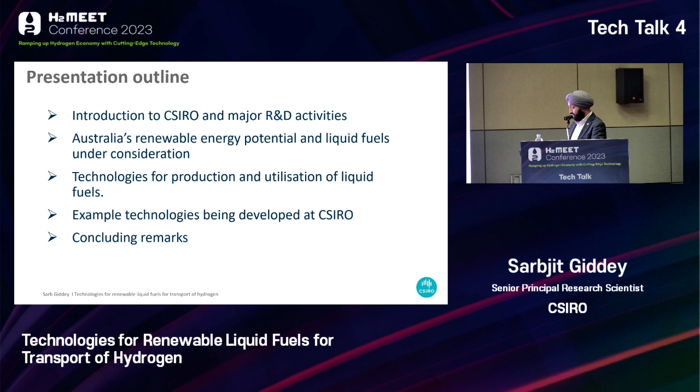CSIRO is Australia's major government funded research and development organization. We have about 5,000 staff and about $1.2 billion budget. About half of the funds come from the government, and the rest of the funds for the R&D work comes from working with industry and through our intellectual property, through licensing our technologies.

Just a bit on CSIRO's, some of the inventions I have just listed here. As everybody knows about Wi-Fi that you use every day for your laptops and mobile phones, it's CSIRO's own invention. Also the plastic banknotes, that's also CSIRO's invention, and some of the others. Just to mention ultra battery, that was also an invention of CSIRO, which is a hybrid technology of lead acid and ultracapacitor.

This is just showing the complete suite of hydrogen related technologies, starting from hydrogen production by biomass or by electrolyzers integrated with renewable energy sources, up to the end utilization of that hydrogen in the industrial sector or for automotive applications. So CSIRO is working and developing various technologies in this suite of technology shown here.

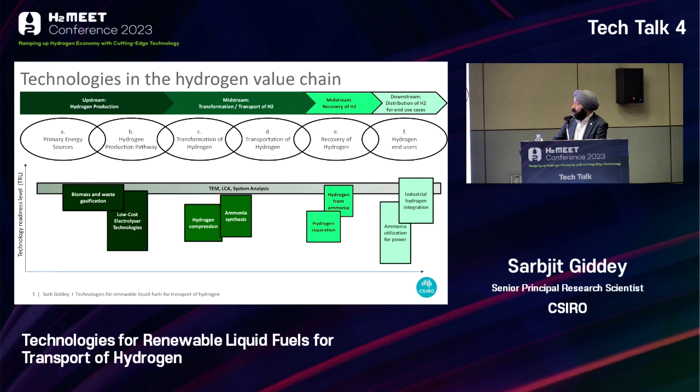On the group's activities, within CSIRO Energy Business Unit we have about 350 staff, and the Energy Business Unit is further divided into 3 programs, one of which is Energy Technologies. Within Energy Technologies we have 3 groups, one of which is thermal electrochemical technologies, and in that group most of the work is related to hydrogen.

and renewable fuels. Another group is working on solar related technologies like solar PV and solar thermal, and the third group is working on sustainable carbon technologies, mainly looking at CO2 capture and CO2 utilization.

Within the thermal electrochemical technologies group, we are basically focusing on 4 areas. The first one is on the production and utilization of renewable fuels, such as hydrogen and ammonia, developing technologies which are more efficient, more scalable, and can also be deployed at distributed scale. Some of the technologies we are looking at are fuel cells, electrolyzers, hydrogen storage, and also hydrogen and ammonia utilization in solid oxide fuel cells or in PEM fuel cells.

The next area we look at is circular economy aspects of these technologies. As you know, these technologies use quite expensive material which can be very scarce, for example using noble metal materials like palladium, platinum, iridium. We are developing technologies for how these devices can be recycled, in terms of extending their lifetime, but also looking at how we can take out the materials and use them again to build those devices.

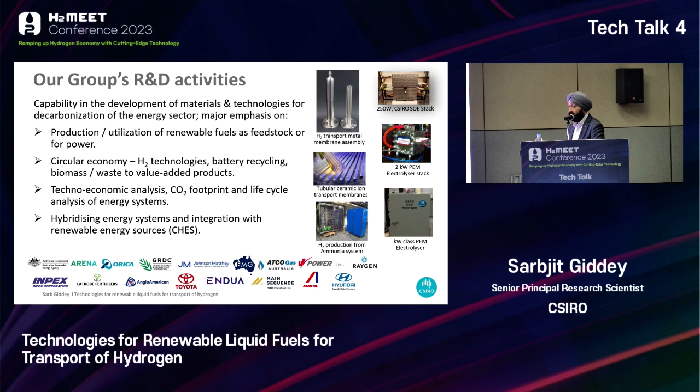Our labs are situated in Victoria, in Melbourne, in Newcastle in New South Wales, and in Brisbane. That's where most of the work on hydrogen and ammonia-related technologies is carried out.

This is just to show Australia's renewable energy potential. As everybody knows, Australia has vast resources of renewable sources, whether it's solar PV, wind, geothermal, or tidal power. If we look at Australia's current electricity installed capacity, it's around 65 gigawatts, and if we compare that with the global installed capacity, it's only around 8,000 gigawatts. Australia has a renewable energy potential of more than 25,000 gigawatts. So you can see how much capacity Australia has to turn those renewables into some usable form, for example liquid fuels, which can be transported over long distances to places where the renewable energy source is not available.

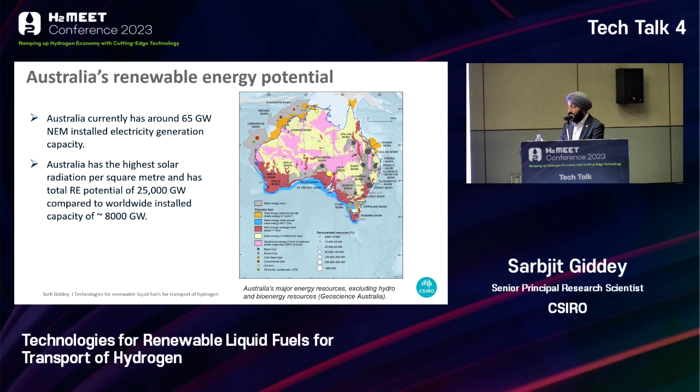This is another map showing Australia's renewable hydrogen mapping scenario. As you can see, the dark green patches in the inland places are where both solar and wind are available. That means you can get very, very high capacity factors, more than 70%. And where one of these resources is not available, there's hydroelectric power available. So we can put these together to achieve very, very high capacity factors, and then use that electricity to produce hydrogen.

As you know, the cost of hydrogen is dependent upon three major factors: the electrolyzer cost itself, the electricity cost, and also the capacity factor, how long you can run your electrolyzer during the day. These are the three factors which really determine the cost of hydrogen. So Australia is in a very good place to use electrolyzers and renewables to produce hydrogen, and turn that into liquid fuels.

On the right hand side, that's the pie chart which basically shows the kilometer square of land area of the top fifth of the prospectivity ratings. As you can see, there's a lot of land available where the renewables are available to a very, very high capacity.

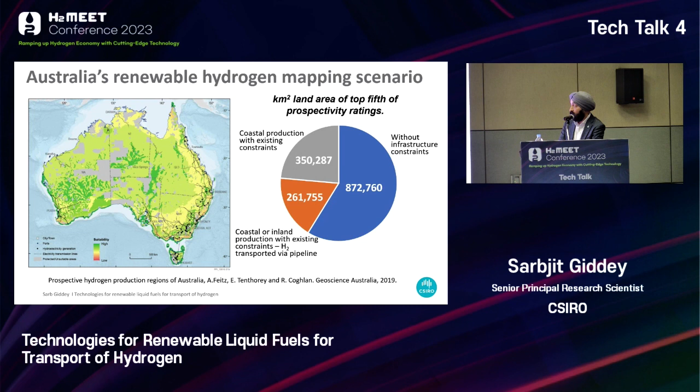The fuels under consideration are three types of liquid fuels: one is liquefied hydrogen, the second is ammonia, and the third is methylcyclohexane. All of these have their own advantages and disadvantages. Liquefied hydrogen requires energy input of almost one-third of the energy content of hydrogen, but it's a pretty good fuel - it's pure hydrogen available on-site that you can immediately use. But on the other hand, there's no infrastructure yet to transport liquefied hydrogen from one place to the other, and there are also some boil-off losses. These are the things we have to consider when considering liquefied hydrogen as a transportable fuel.

The second one is ammonia. As you know, it has the highest hydrogen content, and there's already infrastructure to transport ammonia from one place to the other - all the regulations are in place. But ammonia still requires energy to produce it and also to crack it. Not only that, once you crack it, you have to purify that hydrogen so that no ammonia is left, to use it for fuel cell applications, whether residential or automotive.

The third one is methylcyclohexane. That's basically used as a way of carrying hydrogen from one place to the other. You have to hydrogenate toluene to convert it into methylcyclohexane, and then again convert methylcyclohexane back into toluene. Both processes require higher temperatures, higher pressures, and some purification will be required when you dehydrogenate methylcyclohexane into hydrogen. Another disadvantage is that once methylcyclohexane is transported and you strip the hydrogen out, you have to send that toluene back in the ship. So that's going to cost.

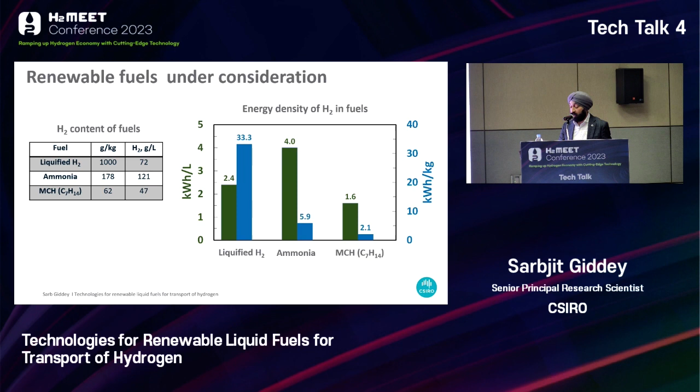Apart from liquefied hydrogen, ammonia, and methyl cyclohexane, there are other fuels also being considered, like methanol, dimethyl ether, even methane as well. If CO2 can be captured from some sources, from industrial processes, we can convert that CO2 and hydrogen produced by electrolyzer into these liquid fuels.

So I'm just going to cover some of the technologies being developed. There are conventional technologies, and then there are new technologies being developed to make ammonia production and methyl cyclohexane production more at a distributed scale, make it more efficient, and also generate some processes which can be integrated easily to the renewable energy sources.

So this slide basically shows how ammonia synthesis technologies are being developed. As you know, currently ammonia is produced by the Haber-Bosch process. Natural gas is the feedstock used there, and it requires very high temperatures and pressures, so we are looking at more than 200 bar pressure.

So here are some of the alternatives people are looking at. One is just improving the Haber-Bosch process itself, developing new catalysts, improving the catalysts and absorbents which can absorb ammonia, and basically shift the equilibrium so you can produce more ammonia, more conversion of nitrogen and hydrogen to ammonia. The second one is looking at just producing hydrogen from an electrolyzer, then compressing that hydrogen to higher pressure, and also producing nitrogen from an air separation unit, and then you can still use the Haber-Bosch process and produce ammonia.

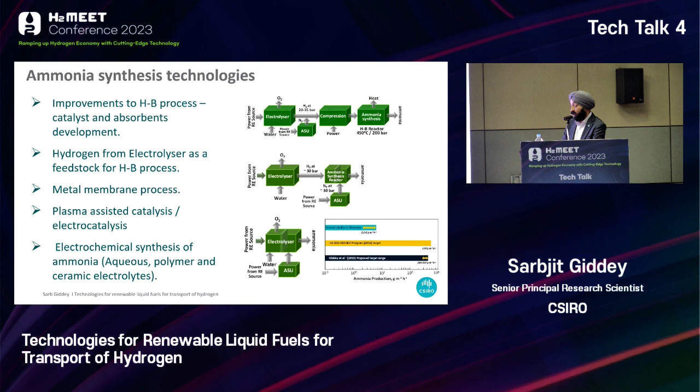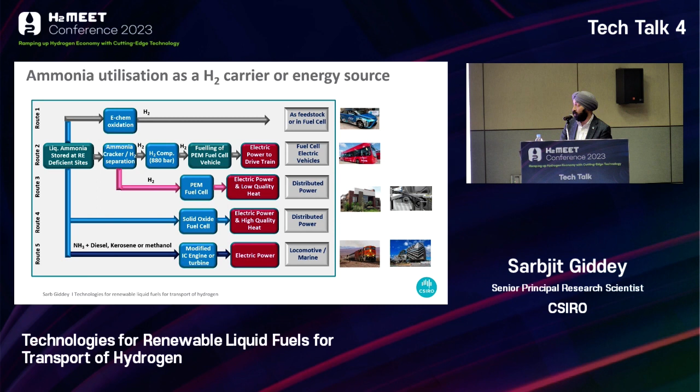So now we are looking at, can we look at some electrochemical technology? Why we want to look at electrochemical technology is because they can allow us to be easily integrated with renewable energy sources, and they can be at a distributed scale. Also, if we are using a membrane in there, ceramic or polymer membrane, that will allow us to produce pure hydrogen. It may not need any hydrogen purification.

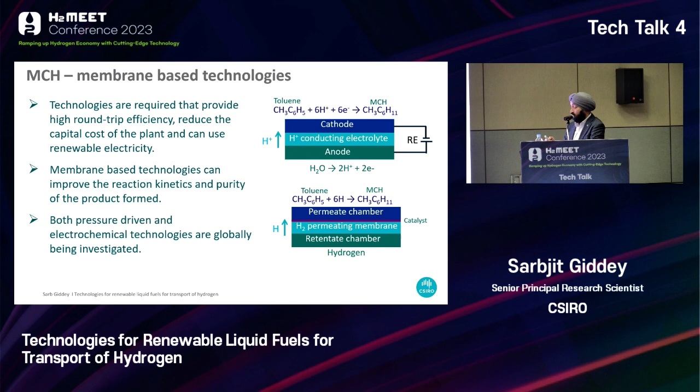So that's the processes. These electrochemical - one at the top is an electrochemical process, but then at the bottom is a metal membrane based process. So either it can be voltage driven, and the bottom one based on metal membranes can be just a pressure driven process. But again, this technology is at a very early stage - there's a lot of work being done in this area.

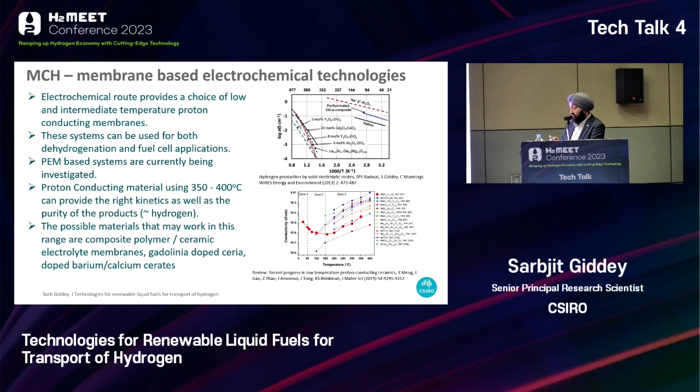But this can be the next thing which probably can make our dehydrogenation processes quite efficient if we can develop those materials, and it can be deployed not only for methylcyclohexane or toluene, but also for ammonia cracking or ammonia production, because you can have steam on one side, produce your protons which go through to the other side, and you can have hydrogen on the other side. Currently there are no materials available which give sufficient proton conductivity but are also robust, so that's a quite good area to look at.

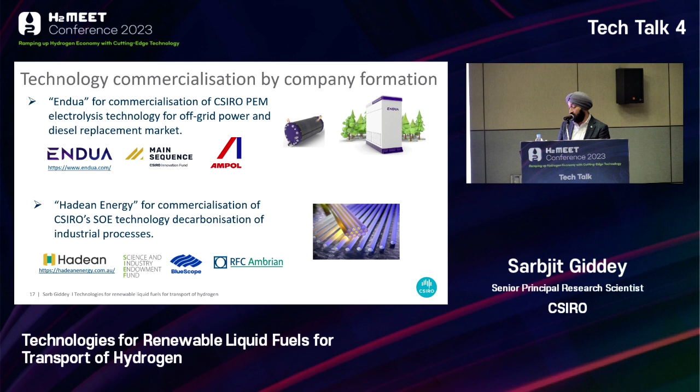Just touching on ammonia synthesis, this is another technology we have been developing. As I mentioned, it's a membrane-based technology, and it allows you to use hydrogen directly from the electrolyzer fed to our reactor. It's a hybrid concept, membrane-based reactor, and you can produce ammonia. We've been able to produce ammonia at 450 degrees centigrade and around 30 bar pressure. The hydrogen, available directly from the electrolyzer, fed directly to the reactor, allows us to achieve between 10 to 15% hydrogen-to-ammonia conversion rates. That's another technology, based on our metal membrane.

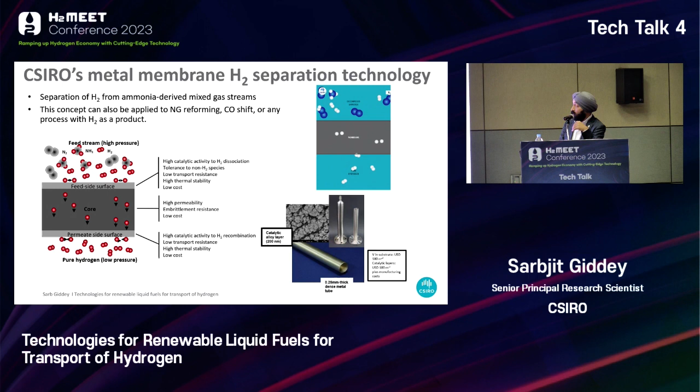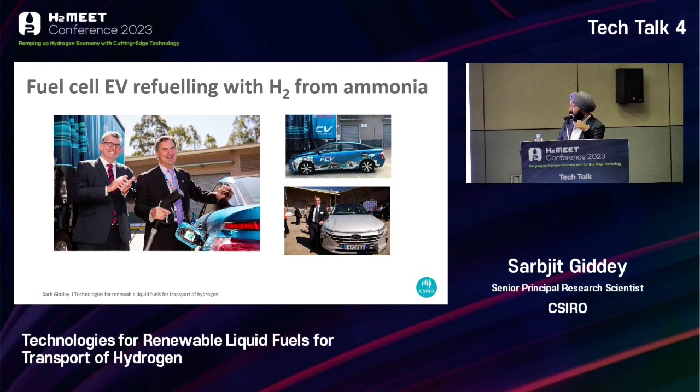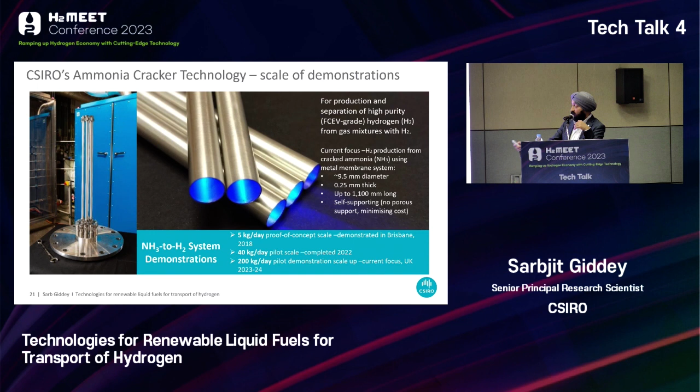This is ammonia cracking technology, and it allows you to produce 100% pure hydrogen. We demonstrated this technology in 2018 by refueling Hyundai and Toyota fuel cell cars. We have been working with Hyundai to develop this technology to the next stage. Currently we are at 40 kilograms hydrogen production per day. Thank you.

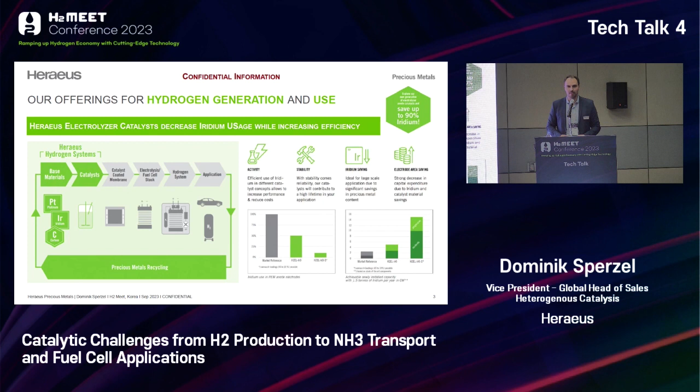Once the hydrogen has been produced through PEM or any other technology, very likely there is a requirement of purification post-electrolysis. Here a deoxygenation reaction can take place when you want to purify the hydrogen from traces of oxygen that might be left within the stream.

Different technologies can be applied, both platinum-based and also palladium-based technology, depending a little bit on cost. Historically everyone used palladium because it was super cheap, but then through usage in gasoline engines the price of palladium surged quite a lot. So platinum became a little cheaper, and you can easily substitute both metals and exchange them. The cheaper option in the market today is platinum-based versus palladium-based.

These catalysts come in all different shapes and sizes—pellet types, sphere types, star type, whatever you guys prefer, that's all available.

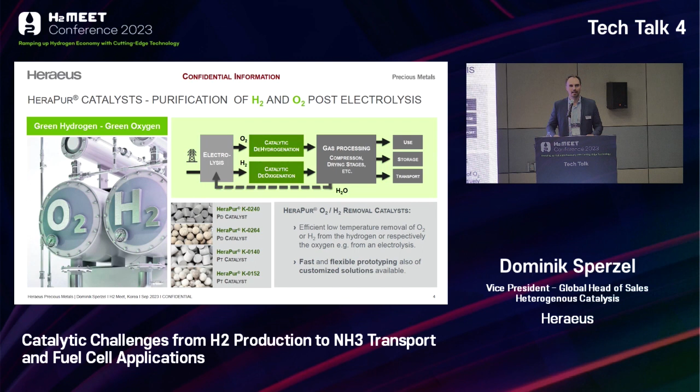Also, one very interesting move that many of the large EPCs are currently making, companies like Linde or Air Liquide for example, is that they also look at oxygen as a value stream. And here in the oxygen there might be trace amounts of hydrogen, so through a catalytic dehydrogenation you can also get rid of the hydrogen and build use cases for the oxygen as well.

Once hydrogen has been produced and purified, I also wanted to connect to the former speaker—it needs to be transported. Because I come from Germany, and in Germany we have big problems with high energy prices and high energy imports, because we cannot produce a lot of energy by ourselves. So we're really dependent on energy exporting countries, like maybe Australia in the future.

Different types of carriers have obviously been discussed in academia for many years, but also within the industry. In Germany, I can tell you we are very much hyped by ammonia. Why? The infrastructure already exists and it just needs to be scaled. We believe this is the main advantage for ammonia at the current place.

Also, when we look at the catalyst space, for example, our company has been involved within the ammonia value chain for many years already. The main application for us is so-called ammonia oxidation, the Ostwald process, mainly for the fertilizer industry, or Australia. There's also big markets with companies like Orica that produce explosives, for example. So we know a lot about this industry, a lot about problems with ammonia, and a lot about how to make best use of it.

So our company has also decided to move a little bit forward in the value chain. We have, in partnership with companies, developed technology for ammonia synthesis. And also what we're going to show today, we have developed our own proprietary technology that we supply to different players within the market for cracking.

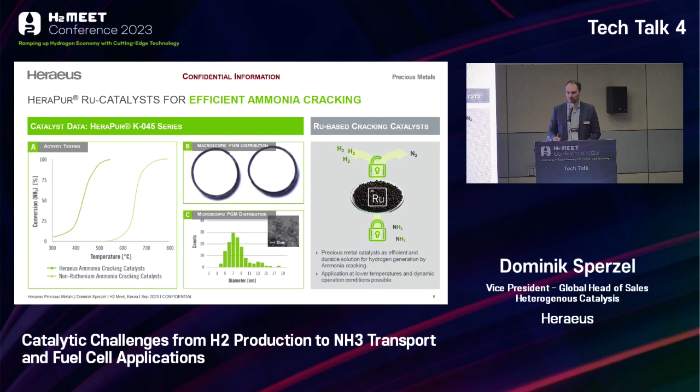When we look at ammonia cracking, we basically see different use cases, and different catalyst technology will be applied for these. We see 3 in particular. Number 1, large industrial processes. One could think about, for example, a large harbor where you have ammonia tanks and ammonia tankers providing ammonia into large storage facilities, then a large scale cracker, and the hydrogen ultimately is directly fed into the existing natural gas grid.

So there are many case studies currently within Europe, for example in the Netherlands, in Belgium, and also in Germany, where big EPCs have already built their pilot plants. We also know that, for example, in the Korean market, there are many pilots planned through smart energy institutes and large companies. So this is for sure something which will find a way in the future.

What we realize is that many of these companies simply try to retrofit the existing SMR technology, and I think it's quite a smart move because SMR is quite well studied. The reactor technology is very well known, the equipment is very well known, so it's just a different feed that you feed to the reactor, and here catalysts are also very well studied. I provided a few examples, for example this ring-based catalyst, which might have some pressure drop optimized behavior ultimately.

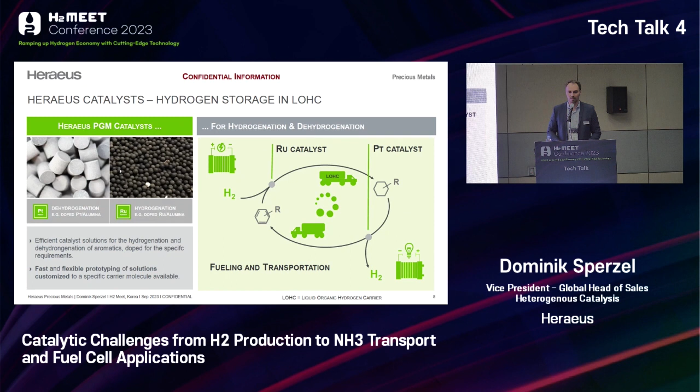And then lastly, I wanted to mention it because when I looked at the exhibitors here in Korea, I saw a lot of activity also in decentralized reforming applications for decentralized heat and power, for example, and a lot of different units. For this type of application, it can be an SOFC that they are utilizing, it can be something different. Also in the balance of plant, different catalytic components are being applied. We can work a little bit on the saturation of the hydrocarbons being used, because for sure it will not be direct hydrogen that will be injected at the very beginning. For example, in Germany there are discussions to at least feed a little bit of hydrogen into the existing methane that we already have available in the grid as of today, and so gradually there will be a shift.

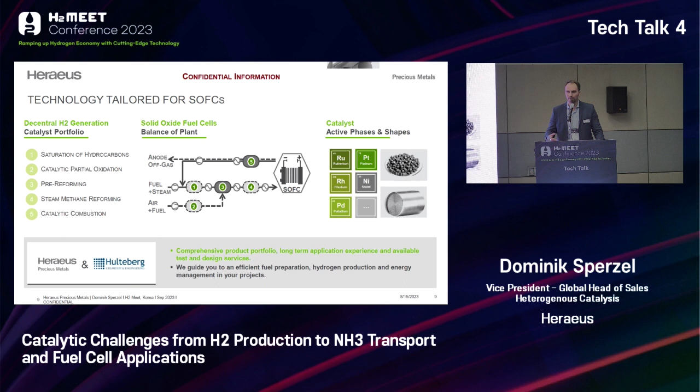But in order to make use of the methane that we have as of today, reforming, for example, is required. So we have developed nice pre-reforming and also main reforming technology, which can be integrated directly into the stack through the formulations that have been developed. And then, in many applications, a catalytic afterburner for any potential hydrogen that might be released into the atmosphere might also be required in this system. So I recommend, because I saw 6-7 exhibitors here, very smart concepts, some in the prototyping phase, some already selling, and I believe it's quite interesting. And again here, different metals can be applied in different shapes and forms, depending on the overall engineering setup.

Yeah, and also as said, many companies like our company, I think we have smart solutions for the catalyst, and also from the commercial standpoint. For example, we have trading offices around the globe which help purchasing people buy precious metal at the right time, to make it available at the right time, in the right quality, at the right place.

But what's super crucial, no technology in the new world will survive without any recyclability. And in my point of view, that's one of the beauties of our products, because they are 100% recyclable. So if you think about iridium in a PEM stack, if you think about platinum in a fuel cell, if you think about ruthenium in cracking, these metals will not disappear. And already as of today, there are very smart collection systems out there, and companies like ours, or for example in China, we have a large joint venture with BASF on the recycling.

These metals can be reused infinitely. So you might have a high initial investment, but then you already use the metal again for new catalyst campaigns, and it brings down capex and opex quite dramatically.

And the recycling rates nowadays, because so many materials are very well studied, are super high, in the very high 90% range, depending on the matrix obviously. But recyclability is one of the big pluses of precious metal related technologies.

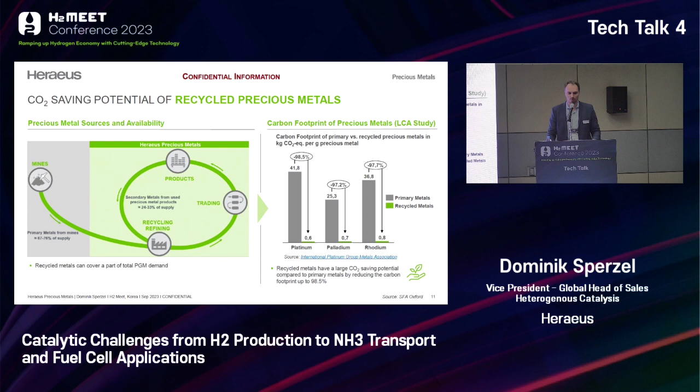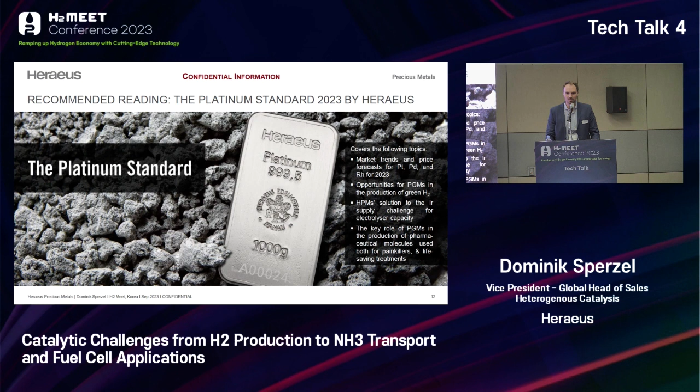With that, we also do a lot of research on the metals. So if you want to go on our website, we have just recently published the platinum standard and also the palladium standard, where it's free for download. We do it together with an agency in the UK which is specialized on this research, where you can read up a little bit about the trends.

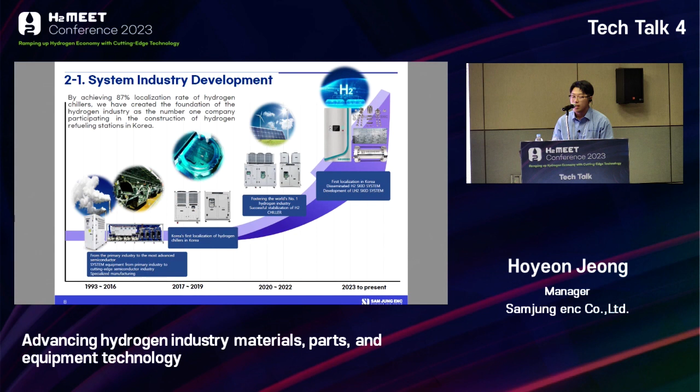수소 냉각기 부분입니다. 우리 삼정 ENC는 1993년에 창업을 해서 산업용 냉각기로 시작을 했습니다. 1차 산업부터 최첨단 반도체 산업까지 36,000건의 냉각기 실적을 보유하고 있는데, 2017년부터 수소 충전소용 냉각기를 납품하고 H2 칠러 안정화에 성공하면서 현재 대한민국에서 수소 스키드 시스템 보급, 그리고 액화 수소 스키드 시스템까지 개발하고 있는 실정입니다.

수소 냉각기의 기술 발전입니다. 맨 처음 수소 충전소가 구축이 될 때는 해외 제품을 모방하거나 해외 냉각기를 수입해서 의존하던 실정이었는데, 거기서 우리 삼정 ENC는 독자 개발, 국산화에 성공하여서 국산화율 87% 이상, 또 수소 전문 기업 선정 등으로 현재 독보적인 1위를 달리고 있습니다.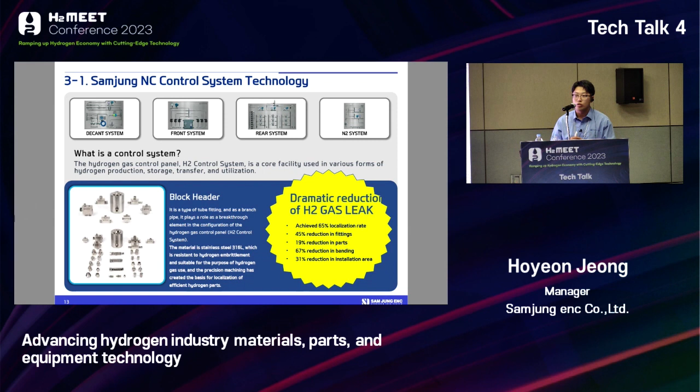우리 삼정 ENC의 제어 시스템 부분입니다. 제어 시스템과 수소 H2 컨트롤 판넬에 있어서 다양한 형태로 수소 생산, 저장, 이송, 그리고 활용까지 전반적인 수소 제어를 할 수 있는 판넬이라고 보시면 되겠고요. 최근 우리 삼정 ENC에서 블럭 헤더라는 것을 개발하여서 유니온 연결 부위들을 블럭 헤더를 적용함으로써 수소 리크 포인트를 줄인다든지 운용 비용 절감 등의 효과를 누리고 있습니다.

수소 부품 국산화 신기술인데요. 이런 수소 제어 판넬에서 사용되는 부품들, 수소 판넬에 들어가는 부품, 이런 부분에서 우리 삼정 ENC에서 직접 개발하고 생산하고 있습니다.

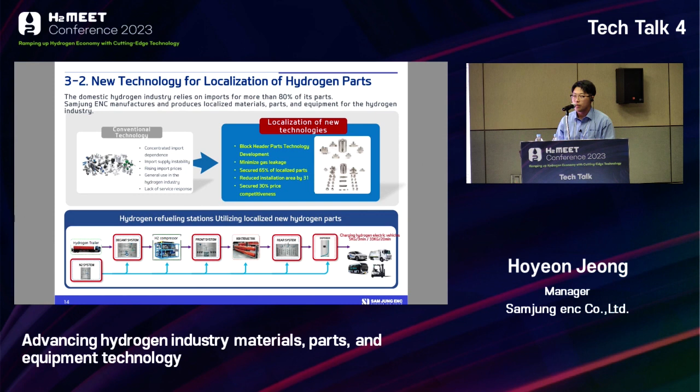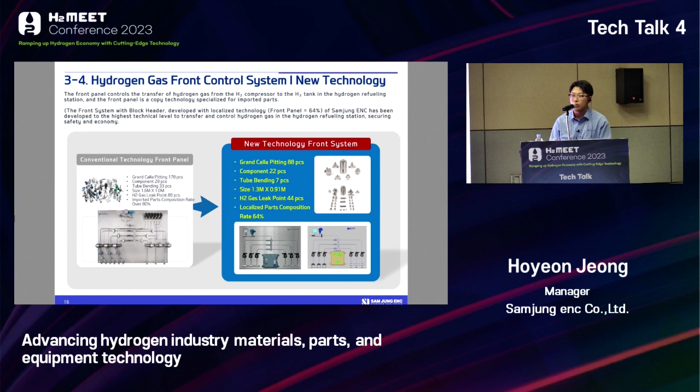프론트 컨트롤 시스템입니다. 아까 데칸트 판넬 같은 경우에는 튜브 트레일러에서 수소 압축기로 갔다면, 압축을 한 수소를 이제 저장용 탱크로 이동할 때 사용하는 판넬이라고 보시면 되겠고요.

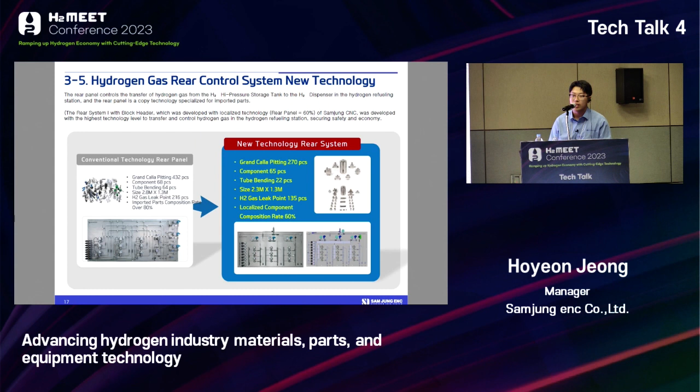리어 컨트롤 시스템입니다. 아까 압축기에서 압축을 해서 저장용 탱크에 저장을 했으면, 이제 실제로 차량에 충전을 하기 위해서 저장용 탱크에서 수소 충전기로 이동할 수 있도록 제어를 할 수 있는 리어 판넬이라고 보시면 됩니다.

N2 컨트롤 시스템입니다. 이러한 부분은 질소 컨트롤이 필요한데요. 수소 충전소에서 질소를 제어할 수 있도록 만들어진 판넬이고, 여기에도 모두 블록 헤더가 적용되어서 특허 기술을 적용하였습니다.

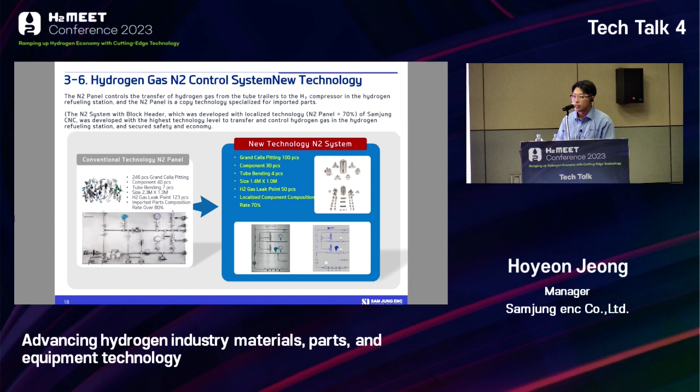우리 삼정 ENC에서 수소 경제 네트워크를 이루고 있는데요. 최근 한국가스기술공사라든지 수소융합 얼라이언스 쪽에서 저희에게 수소 전문 기업을 지정을 해주었고, 또 대기업이라든지 여러 중소기업 등 수소 경제 네트워크를 활성화하는 데 주력하고 있습니다.

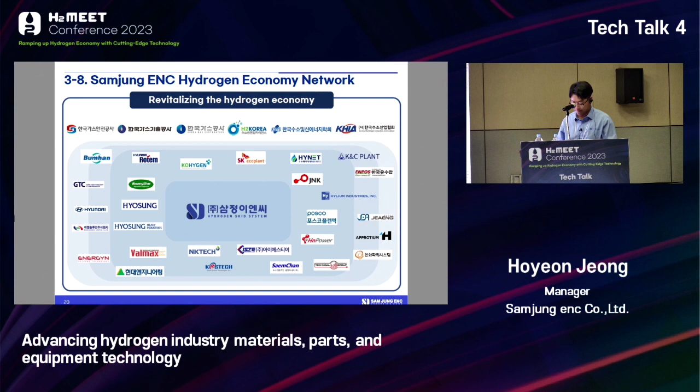우리 삼정 ENC는 기술 혁신과 사회적 책임을 다하는 수소 전문 기업으로 성장할 것을 약속드립니다. 감사합니다.

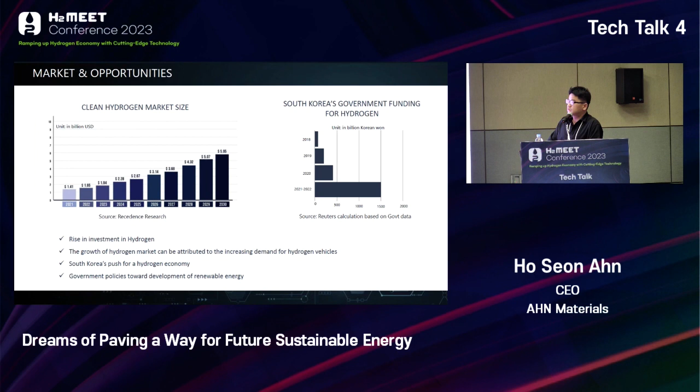Here is the market and opportunities. As time goes, the clean hydrogen market size is growing like this, and South Korea's government funding is also increasing dramatically. Government policies for the development of renewable energy are very fresh and promising to us. And here is the current stage of hydrogen storage technologies in the market.

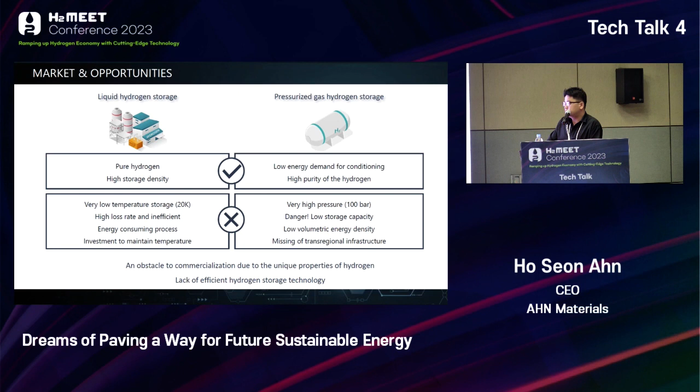That's 400 or 700 bar — this is an obstacle to commercialization due to the unique properties of hydrogen. So we can see the lack of efficient hydrogen storage technology.

So here is our development roadmap for the hydrogen storage tank. We have three models: the first is a compressed cryo hydrogen tank, second is hydrogen storage tank using graphene material, and third is the liquid hydrogen tank system.

The three types of hydrogen tank each have unique technology — such as, we don't have any cryo system for ultra low temperature, meaning we just use liquid nitrogen to keep and maintain ultra low temperature, such as 77 Kelvin. Because we adapted liquid nitrogen, we focus only on the portable type of hydrogen storage system.

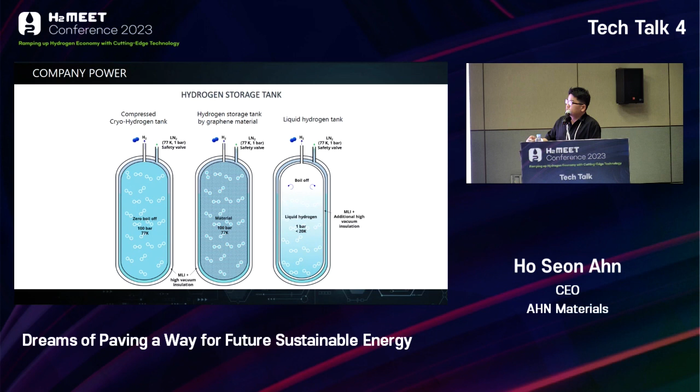Here is a simple table comparing the three types of hydrogen tank. One is the compressed cryo hydrogen tank. The unique technology is that all types of hydrogen tank have a cryogenic 3-layer or 4-layer tank, meaning we have an ultra vacuum layer and an ultra insulation layer.

Second, I want to highlight the liquid hydrogen tank and the compressed cryo hydrogen tank, because we make the ultra low temperature using liquid nitrogen. Liquid nitrogen has special properties to evaporate faster than hydrogen. This is a natural phenomenon because 77 Kelvin is higher than the boiling temperature of hydrogen.

So for all types of hydrogen tank, we can estimate a superior storage capacity rather than the normal compressed gas hydrogen storage system.

Here is the compressed cryo-hydrogen tank. We have 3 layers, and the geometric design of the portable tank is efficient to withstand both normal storage pressure, meaning 70 or 80 bar for most storage materials, and refilling pressure of 100 bar at cryogenic temperature.

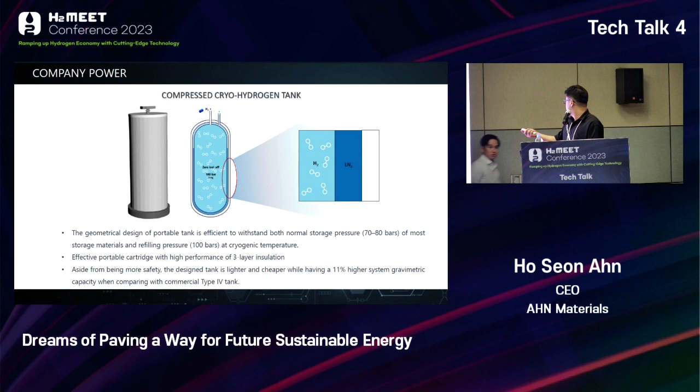Here is a liquid hydrogen storage tank. We adapt the 4-layer design because in a portable liquid hydrogen storage tank, we do not have any cryo system, so we can make a very light system for storage.

However, here is the advantage of applying the portable PEMFC system: it means we achieve zero boil off, because the liquid nitrogen boils faster than the liquid hydrogen, and each layer has a vacuum layer.

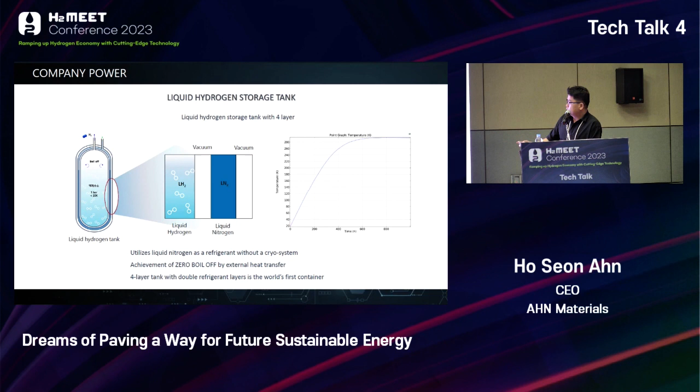So we need the 4-layer design in order to achieve zero boil off. The third one is the hydrogen storage material, a 3D graphene. This is our own original technology from Ahn Materials.

3D graphene has 2 types: wet fabrication and dry fabrication. The core technology of both comes from the thermal and heat transfer mechanism, not from the typical material development field. This unique mechanism comes from mechanical engineering, similar to heat transfer.

So inside the tank, inside the compressed tank, we try to fill up the 3D graphene as the absorbing material. With the 3D graphene storage, the test system showed a very high hydrogen storage capacity compared to previous research or studies.

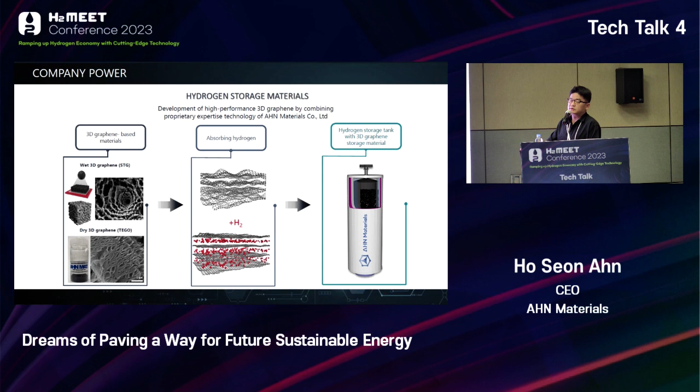We are now confirming and checking the reliability and reproducibility of the data, but recently we have gained confidence to present our material as a hydrogen storage material. Previous research reported a hydrogen storage uptake of maybe 3 or 4 weight%. However, our materials, both dry type and wet type, showed much higher uptake than reported materials.

This means the three-dimensional graphene, the porous carbon, must be made of flakes of graphene, each flake. I think it has its own unique mechanism to store hydrogen, different from a typical absorbing system. So we are proving and checking its performance and capacity through hydrogen storage capacity verification.

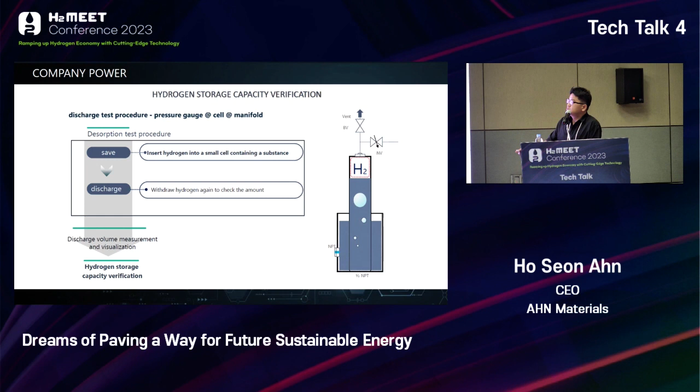Since this doesn't support video playback, I'll just show the concept. When we discharge the hydrogen from the three-dimensional graphene, we can measure the discharged hydrogen like this. So finally, we measure the stored hydrogen from the graphene.

Finally, we can see the data. The stored data is real. However, we still don't know exactly why it stores so much hydrogen inside the graphene. I think we need more time to verify and prove its mechanism.

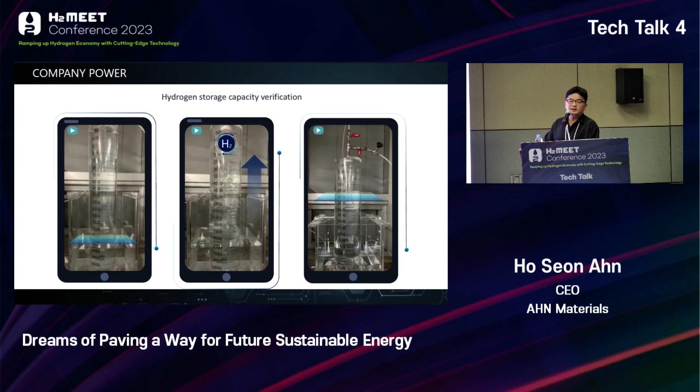However, as a CEO in the industry, I think the industry can move faster than the scientific field. A good example is OLED—nobody really knows why OLED works and operates the way it does, yet we already see TVs and displays using it in the industry.

Depending on the application and required working time of the drone or the PEMFC, we can apply various types of hydrogen tanks, such as the cryo compressed hydrogen tank, the liquid hydrogen tank, or the three-dimensional graphene material tank. This is our dream for the future of a portable hydrogen system.

This system is ready to produce the hydrogen cartridge according to the storage condition required. If it requires ultra-low temperature, the system must keep and maintain that condition. The hydrogen cartridge is then automatically replaced on the drone or portable mobile system.

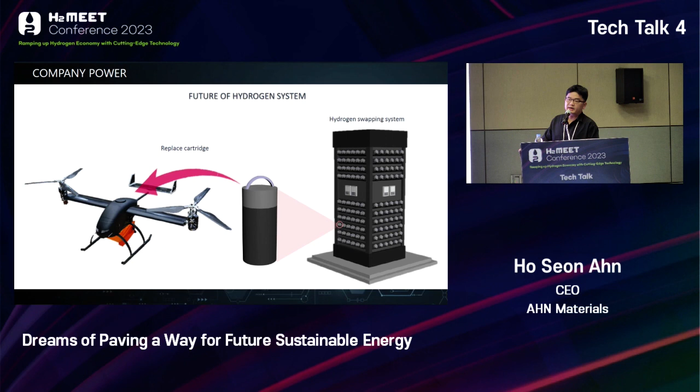So, portable hydrogen production system from ammonia cracker. This is just another application currently under development in our company.

The ammonia global market size is also increasing because there are lots of demands for hydrogen carriers. So let's look at the process, and the advantages and disadvantages of the ammonia system as a hydrogen carrier.

The ammonia carries 17.8% of the hydrogen by weight. However, in volume energy level, it has 2 times more than liquid hydrogen. So ammonia is very attractive as a hydrogen carrier.

So here is our idea: if we combine the ammonia hydrogen carrier and the production system as a portable tank, it means we can achieve a milder condition to store hydrogen and produce hydrogen.

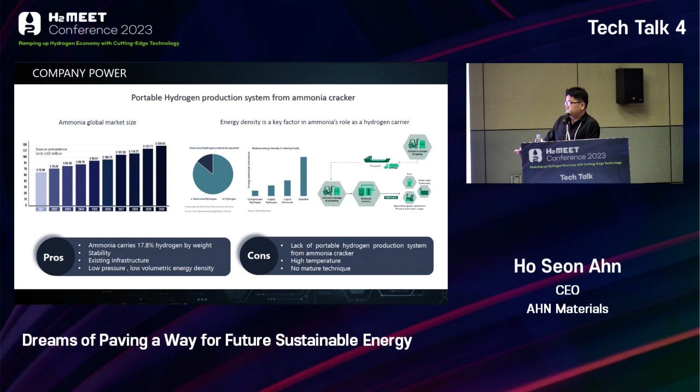So here is our concept from thermodynamics and thermal engineering: a pressurized ammonia tank, and a pressure-reducing part. For the pressure part, instead of an expansion valve, we just use a capillary tube.

Using the capillary tube, we apply and restore and regenerate the heat, because the ammonia cracker system requires a very high temperature, over 500 Celsius, in order to crack the ammonia, even when using a catalyst.

So this cracker system requires two core technologies. One is the catalyst system, the second is the system itself. We just completed the design of our concept for the portable type ammonia cracker system. For the second part, Professor Samjung Kim is developing the cracker catalyst system.

Because our background is mechanical engineering and heat transfer, we are trying microchannels in order to enlarge the surface area for contact between the catalyst and the ammonia. Through CFD and simulation results, we can expect its performance, and the cracking efficiency is also very high.

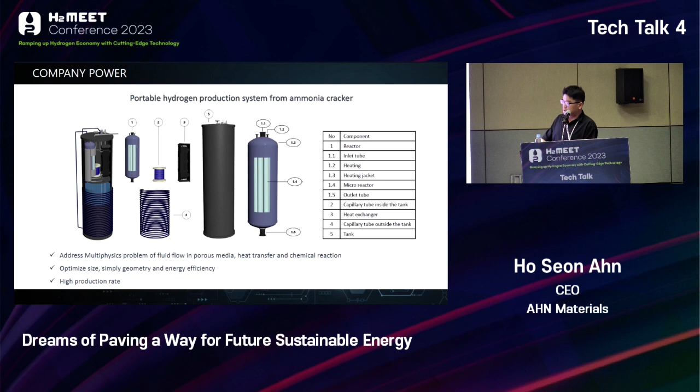This system, at the initialization of the ammonia cracker, uses a lithium-ion battery. However, when it starts to operate and the cracking condition is reached, over 500 Celsius, then we can guess the stable production of hydrogen, and then we use electricity from the PEMFC.

So here is a very important concept: how can we reduce the portion of electricity produced from the PEMFC? Our target is only 10%. When we use a 1 kilowatt PEMFC system, it means we only need 100 watts to operate the portable ammonia cracker system.

So nowadays we've reached 13%. Through engineering, with a precision approach in order to reduce heat loss, I think we can achieve the 10% electricity usage target.

A quick introduction about our company. We are known as Risktec, originally from the UK, back in 2001, and we have several offices all around the world. I'm coming from our Malaysia office, and we have around 260 full-time employees across 16 offices worldwide, and almost more than half of the figure are sitting in our UK offices, 3 in Scotland and the rest are in the UK. We are around 40 million euro in revenue last year. We are working with 6 diverse market sectors, and we have delivered thousands of projects with a lot of clients all over the world, mainly for major accident hazard industries.

So anything that falls under major accident hazards, we have the ability to assist either the operator or the big contractors. The risk management that I'm going to talk about is all about the way how we manage the risk, mainly the high risk, and it may be applicable to the big contractors. Potentially in Korea, we have big contractors, the engineering contractors, the EPC contractors, and also for the facilities owner. For instance, like Shell. I mean, oil and gas example is like Shell, Saudi Aramco, things like that.

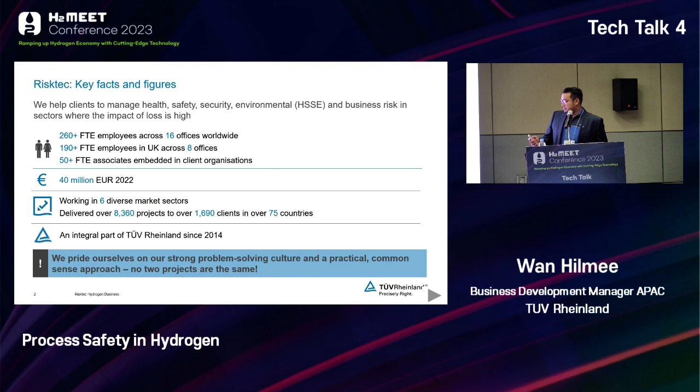And we have several business streams basically. The major one is on the left side, consulting, and we are doing things like hazard identification, things like HAZOP, safety critical element, safety critical equipment identification, and for the same consulting business, we are doing the learning as well. We provide the training to educate the client how to do the risk management, how to manage your risk, and how to reduce the risk basically. And we have a small team in the UK for the resourcing. Some of the clients are asking for secondment in their projects. Small inspection entity as well in the UK, and also the R&D.

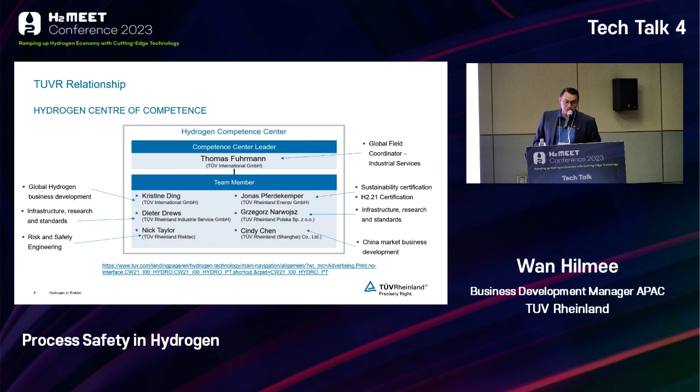This is our relationship with our parent company. Some of you may be aware that my colleague, Mr. Thomas, from our Germany office, he's our competence leader for hydrogen in TUV Rheinland. And the team members in TUV Rheinland consist of several people. If you can see Nick Taylor, I think he is sitting in our UK office. He's the representative of Risktec Solutions, but I'm going to talk on behalf of him basically. This is our offices for Risktec only. Our HQ is in Warrington in the UK, and I'm sitting in the Kuala Lumpur office. And since TUV Rheinland has bought us,

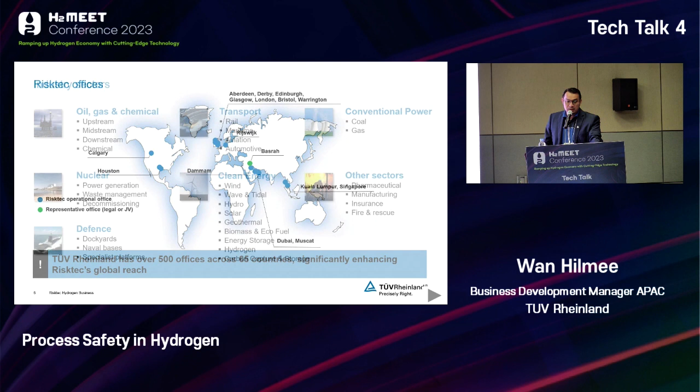they have global offices all around the world, and it has significantly enhanced our global outreach. For example, if there is any need in Korea, the contracting route can be done through the local TUV Rheinland Korea entity.

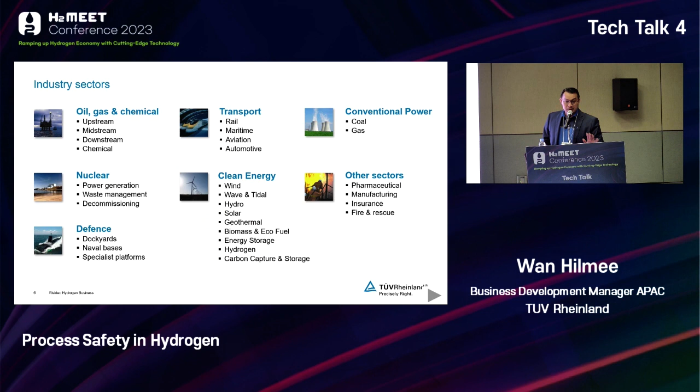And this is some of the industry sectors that we are serving basically, but all of them we are serving in the European region, in Malaysia, in Dubai, in Middle East operations. Mainly we are focusing on oil and gas and chemical, and hydrogen falls under the clean energy sector. Some of our example clients - why we put oil and gas and chemical, because most of the big operators like Shell, BP, ExxonMobil, you name it, they are all going for net carbon zero emission vision by 2050, something like that. So hydrogen is obviously a big thing for the oil and gas operators. And you can have a look at the rest of our portfolio. We have more than that basically. This is just a key client list for us.

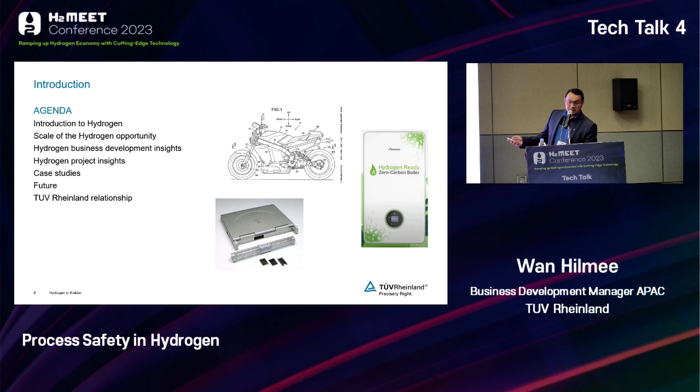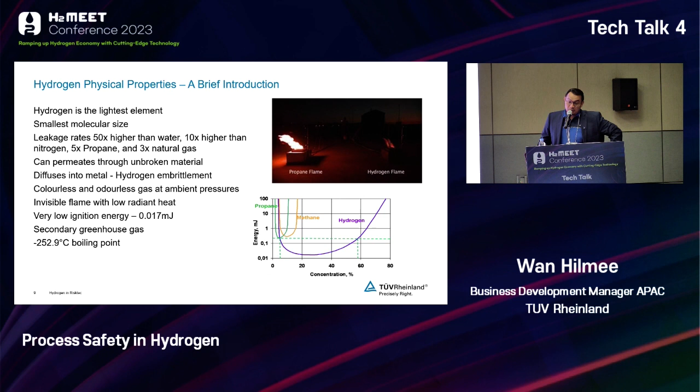I'm going to touch a little bit about hydrogen, and I will talk about the risk management, or we call it risk management, the way how we do the risk management and why we are going to do that. As a very brief introduction of hydrogen, I think all of you may be aware about the properties of hydrogen: lightest element, smallest molecular size. Their leakage rate is higher than any other properties basically. It can permeate through unbroken material. What else? Very low ignition energy, invisible flame, stuff like that. So clearly from this point, hydrogen can be one of the risk or hazard sources basically.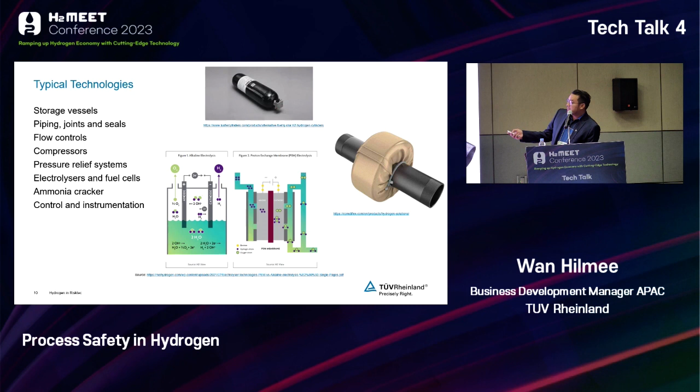And this is the application of hydrogen technologies. I think most of you here are what we call hydrogen technologies service providers, so I think you are better than me in terms of the technologies. And the scale of hydrogen opportunities - I think every part of the world at the moment is talking about the hydrogen economy. In my country, in Malaysia, we do have a similar exhibition as well a few months back, but at a smaller scale. This one in Korea, the exhibition is way bigger. I don't have to touch on everything, but as you can see, the hydrogen economy covers most of everything. In Europe at the moment, they are talking about using hydrogen as one of the energy sources to heat up their houses, and as a source for cooking as well.

In some other countries, they are talking about having a transportation system, and all of this will involve safety, will involve risk management. How do you ensure you manage your risk properly?

This is in respect to how we are getting ourselves involved with hydrogen related projects. As you can see from the graph, it goes exponentially, basically the growth in terms of project involvement for our team.

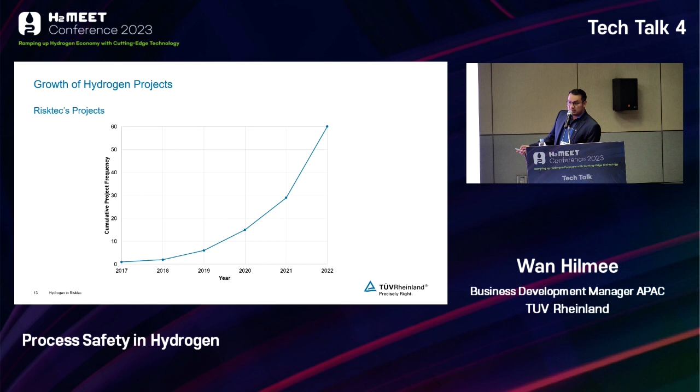Okay, this is the key point of my talk today: how to manage the risk and why we need to manage the risk. Who asks you to manage the risk, basically?

Normally in our business, we are getting very much involvement in oil and gas industries. In Malaysia, we have Petronas. In Saudi, they have Saudi Aramco, and they are all self-governed companies. So in Malaysia, for instance, Petronas, as a national oil company, they are self-regulated. So all other operators in Malaysia will follow Petronas guidelines. In a way, our business is very much driven by regulatory compliance.

So, like it or not, the operator or the big contractors, for example, Samsung or Hyundai or POSCO, if they're bidding for a project or doing a project in Malaysia, they have to engage a third-party consultant like us to undertake their risk management studies, basically. So our product is a report for certain parts.

It always starts with risk identification. You have to identify your risk for your projects. If, for instance, you are talking about building a new hydrogen plant or something like that, you, as the main contractor, as the owner, you have to identify your risk.

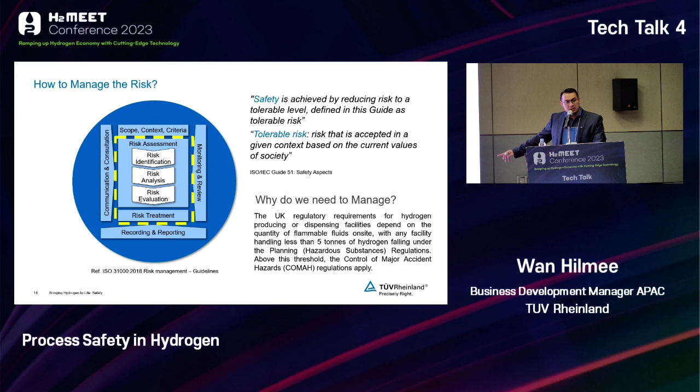For instance, in the UK, any hydrogen facilities handling less than 5 tons will not go for detailed risk management. But beyond that, it will fall under COMAH regulation in the UK. So if they fall under COMAH regulation, then you have to do extensive risk management studies.

That's why I'm telling you risk management is mainly for the big contractors and facility owners, because we talk about reputation, about changing the design, and it can impact the entire community.

For instance, the Deepwater Horizon incident by BP is available as a film on Netflix. It killed only 11 people, but the damage to BP, British Petroleum, is around 20 billion USD, and some lawsuits are still ongoing until now. The reputation and stock market for BP on that particular day went down rapidly, very badly. That's why process safety is a very important aspect - all the big disasters and accidents can actually be prevented if process safety management is taken care of properly.

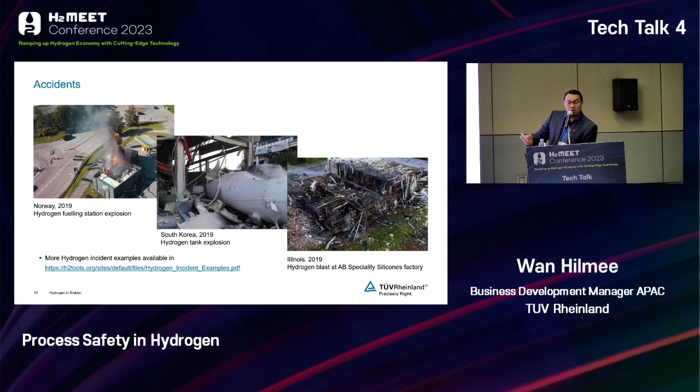So this all comes back to the higher management of each organization to deal with. Sometimes in certain countries it's regulated. I'm not too sure about Korean regulations, not only for hydrogen but other major accident hazard industries, but I'm sure there must be some law about risk management.

Where can we get involved in your projects? Just focus on the bottom one. We can actually get involved with every single project life cycle - conceptual, early stage, FEED or EPC. O&M is by the owner, the project owner, either a petroleum or hydrogen-based company, and also for decommissioning.

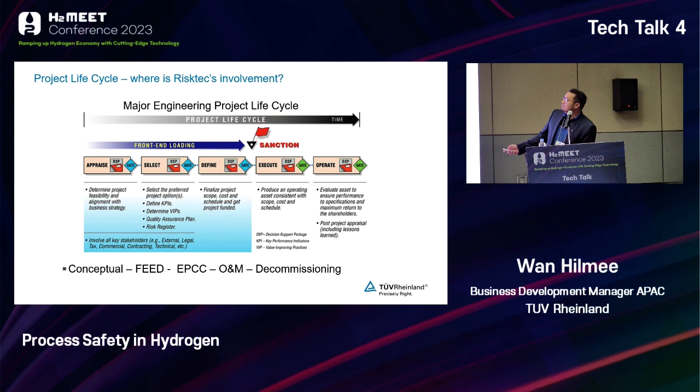This is the last slide about what we are doing. This shows some, maybe not all, of the process safety studies that we do in-house. Maybe not everything is related to hydrogen, like HAZID, hazard identification, HAZOP might be applicable, quantitative risk assessment, fire risk assessment might be applicable.

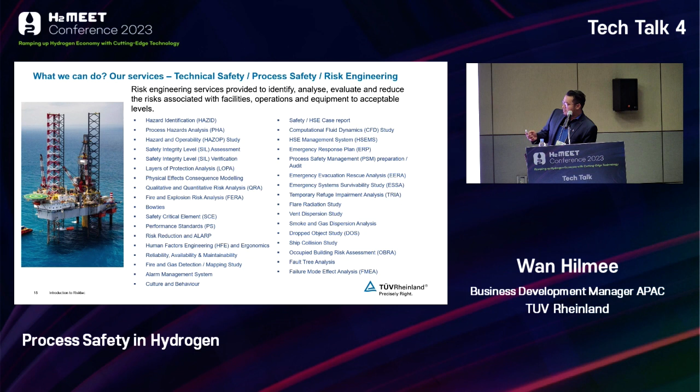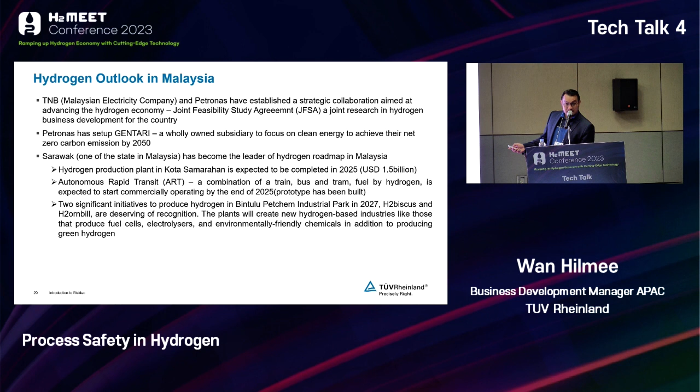Some recent hydrogen experience with examples from various industries, and some outlook in Malaysia as well. We have 2 big projects that have been kicked off, and the main contractors will be from Korea.

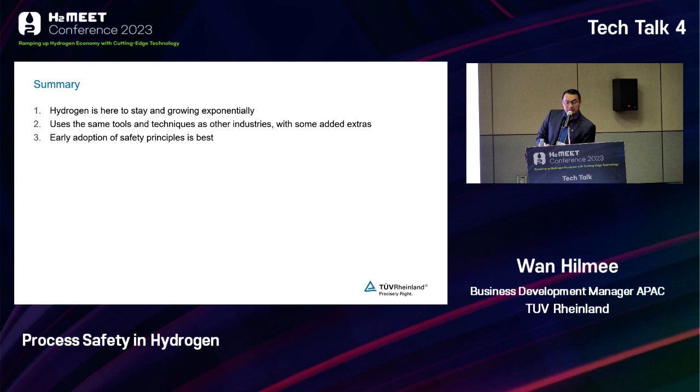And yeah, this is the last slide. Hydrogen is here to stay and is growing exponentially worldwide, but early adoption of safety principles is very crucial. If you have any questions, you can ask me now, or write me an email - I'll respond to you.